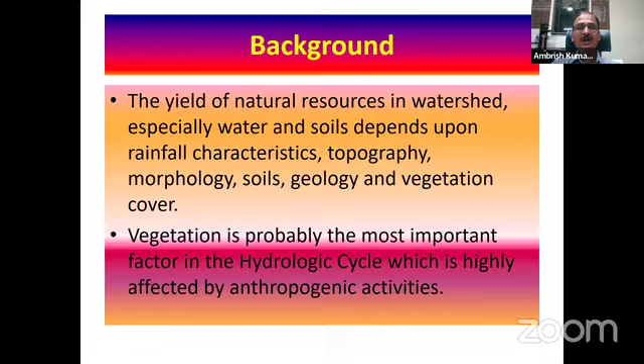So among all these factors, vegetation is probably the most important factor in the hydrologic cycle, starting from rainfall occurrence, runoff, evaporation, cloud formation, and again rainfall. If we see the entire hydrologic cycle, vegetation is one of the key factors, which is highly affected by anthropogenic activities. And this activity we can manage to some extent, compared with rainfall characteristics, topography, morphology, soils, and geology, which are natural and difficult for human beings to manage.

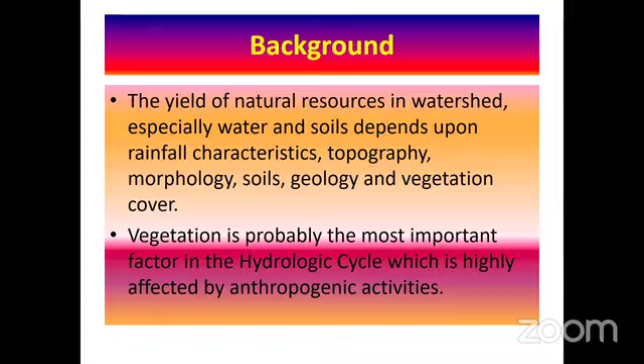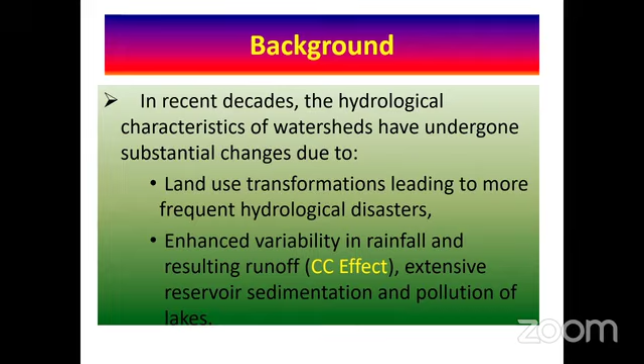Now, in recent decades the hydrological characteristics of watersheds have undergone substantial changes due to land use transformations, leading to more frequent hydrological disasters. In the last two decades, their frequency is very high and diverse. Enhanced variability in rainfall resulting in runoff is, of course, a climate change effect. Rainfall days, duration, intensity are all changing widely in a short span of time. It leads to extensive reservoir sedimentation and pollution of lakes.

So some figures will help to understand the watershed and why its management is required. For land degradation, the watershed is one of the ways, methodologies, or concepts by which one can manage it. First, what type of degradation: water erosion, wind erosion, chemical degradation, physical degradation, and how much area in the country is affected, irrigated and non-irrigated. In the second column, water erosion with soil erosion intensity of more than 10 tons per hectare per year is 73, the highest among all types of degradation.

Total arable land affected by land degradation is 104 million hectares. Water erosion is highest; around 70% of the area is degraded by water erosion. In open forest, where canopy is less than 40%, water erosion is again highest, and the total is 16. So the grand total of degraded land is 120.72, and this is harmonized data from various agencies.

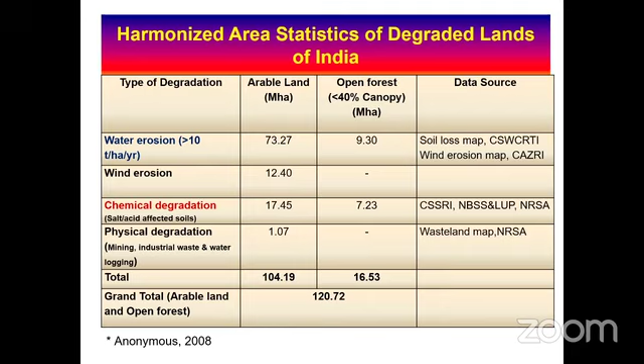So why watershed management? Loss of vegetative cover, followed by soil degradation from various forms of erosion, as indicated in the earlier slide, has left land thirsty for water as well as hungry for soil nutrients. Secondly, regions with livestock-centered farming produce less biomass for animals, which reduces animal productivity, and the inevitable uncontrolled grazing on eroded lands further accelerates erosion. Grazing is a requirement for our livestock, but it causes erosion and deteriorates the ecological balance of that region.

Growing population, as we all are aware, with higher demands for food and fodder coupled with rapidly changing socio-economic conditions, has added fuel to the fire. This factor, population pressure, is tremendous, and we know its repercussions, particularly on the land, where the land-man ratio is reduced. Fourth one, the piecemeal approach. As I told earlier, watershed is not a new term.

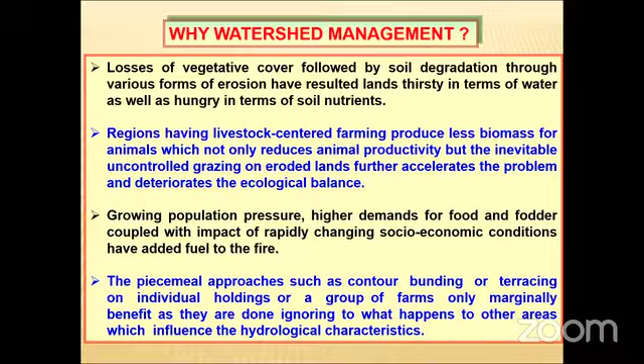So this is also one of the reasons why we're talking here. So sporadic actions generally fail to attract farmers. If the action is divided in a piecemeal approach, the outcome is not achieving at the end what is expected. Certainly, our approach will not attract the farmers.

Thus, for maximizing the advantage, all developmental activities should be undertaken in a comprehensive way on a watershed basis, what we call integrated watershed management. Thus, watershed management emerged as a new paradigm for planning, development, and management. So, watershed, the terminology is the same. Our approaches in planning, development, management are changing with the need of the time, based on our experiences, regional experiences, countrywide experiences, or the experiences taken from other scientists working in their own countries.

So social and institutional aspects, apart from biophysical aspects, following a participatory bottom-up approach is also necessary for getting an effective outcome of the watershed. Watershed management becomes increasingly important as a way to improve livelihoods of people while conserving and regenerating natural resources. So we are trying to manage the biophysical aspects, minimize or control the degradation, cost of cultivation to support or improve the livelihood condition in rural areas.

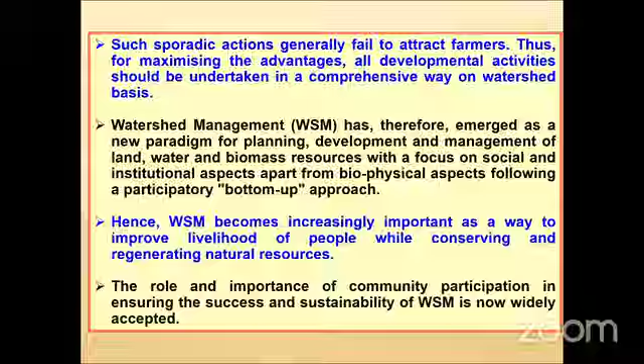So approaches and concepts. In the last 50 years, we are trying many variations in conceptual models, objectives, implementation models of watershed programs, and a number of angles added on in the last few years for betterment of the watershed and to connect it with the climate change resilient approach. The initial protection-oriented approach got enlarged to restoration of degraded areas and then to protection cum production.

So every activity done on the field has some objective, final outcome, end product. So here, production. If our activity in the watershed is well connected to agriculture production, higher productivity per unit area in our natural resource ecosystem, it means the actions taken in the watershed are in the right direction. Watershed management is a single window, integrated, participatory and sustainable area development program.

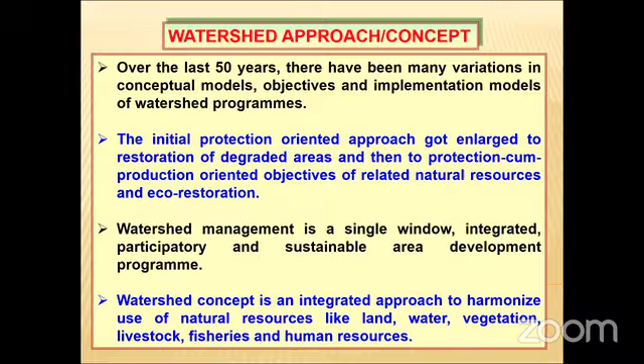Second, the integration approach means starting from a small watershed and upscaling and expanding the area from one watershed to the adjoining area and further adjoining area. So this is also integration. Your effective activities in a larger area, starting from a small micro watershed. A hydrological unit of an area draining to a common outlet. This is the typical definition of the watershed. Of course, most of our fellow participants may be aware: an area having a single outlet for draining water.

So here we are trying to count the water, every drop of rainfall falling in a watershed, as runoff, conserving it as in situ moisture conservation or recharging the groundwater system of that local area. So hydrology is an important factor to understand a watershed. And we also call it a hydrological unit. Watershed is a hydrological unit, and we are accounting, budgeting water in a watershed. It is a classic way of working.

The land, water, and vegetation resources. And the watershed concept has been used extensively because of the importance of water balance in the study of ecosystems. So water balance: rainfall occurrence in a particular area of the watershed, then storage, surface storage, in situ moisture conservation, thereafter recharge. So surface and subsurface interaction is also important to understand if we are talking in a broader sense of a watershed. So groundwater recharge is also one of the key activities in watershed management programs. It also allows accurate measurement and monitoring of components of water balance in the hydrologic cycle.

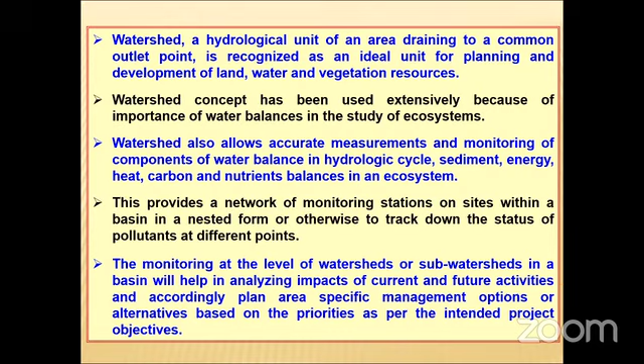So a larger watershed can be divided into a few sub-watersheds, and those watersheds monitored having different land uses. So the impact of land uses on two parameters, soil loss and runoff, can at least be correlated, or we can develop some formulation or method for the relation between existing land use and runoff and soil loss from a given watershed.

So the level of concern is evident by the wide variety of programs and institutions involved in study and management of the watershed. And I have been informed that students and progressive farmers are also attending this particular program. Therefore, I am going slow and slow so that everyone can understand the concept of the watershed properly.

So the traditional top-down approach of watershed management has not paid dividends, particularly because it stressed entirely on biophysical aspects without due regard to socio-economic factors. So these are the factors. And the last point here, integrated watershed covering the area from top to bottom approach is the better way to understand the watershed.

Watershed workflow - of course you are aware, the Pradhan Mantri Krishi Sinchayee Yojana, watershed management programs are under this, and PM-KSY has an end-to-end solution approach. Meaning if you are going to start something, that should have an end product or conclusion.

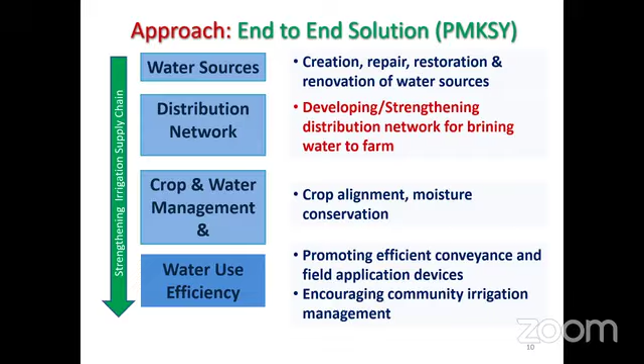So these are the slides helping people understand the activities: rainwater harvesting, community water tanks, groundwater sources, river lift irrigation, water harvesting techniques, terracing, bunding, conservation bench terraces, on-farm development, lined open channels, underground piped conveyance systems, small synthetic collapsible pipes. Nowadays micro irrigation is popular - the National Mission on Micro Irrigation.

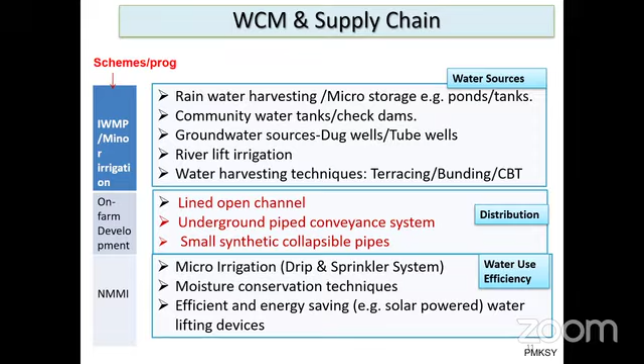Now, soil and water conservation techniques in watershed perspective. Here, for better management, we divide the area into two parts: arable lands and non-arable lands of a selected watershed. In arable lands, on slopes having up to 2%, we have the option to manage soil erosion through crop management.

Cultivation, contour farming, and other methodologies can be managed through plowing and related activities. If the slope is larger than 2%, it's better to go for terracing up to 6 to 8%.

Field bunding is important nowadays under climate change conditions, where rainy days have reduced but the intensity of rainfall has increased in most areas. Field bunding helps a lot, and ridging of the field is important to store rainwater.

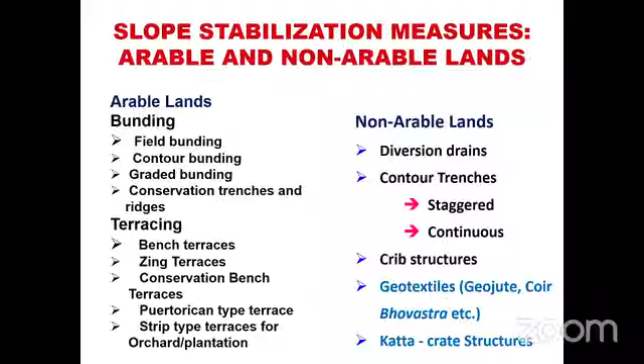Now let's look at why we are working on all these, and what is the impact of these soil and water conservation technologies. In a few forest-dominated works done by the Indian Institute of Soil and Water Conservation, I would like to show the data.

One of the activities is in the Fakot watershed, which many of our friends here are aware of - it's a model watershed started in 1974 by the Indian Institute of Soil and Water Conservation, and thereafter Sukhomajri, which is also a nationwide popular watershed near Chandigarh.

So one example I'm giving - what are the parameters? For biophysical activity, whether on arable or non-arable lands, what parameters should we monitor as indicators to understand the impact of the watershed?

Runoff percentage in pre-project, during intervention, and after withdrawal of the project - you can see after 10 to 12 years, the runoff percentage was very high at 42%, and thereafter reduced to 14%.

Soil loss was around 11 tons per hectare per annum, which reduced to less than 2. Dependency on forest fodder was 60%, which also reduced. Fruit production, milk production, cash crops, and animal rearing methods - every indicator improved.

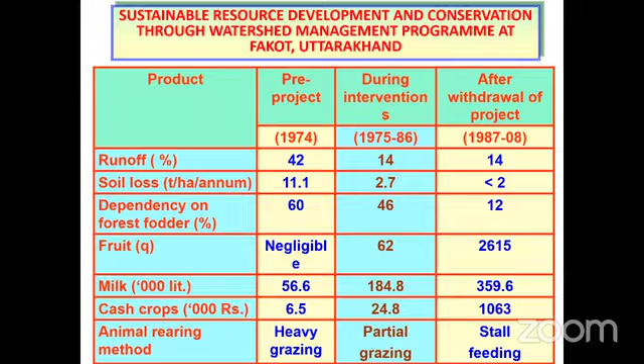After implementation of 10 years of various land and vegetation related activities in the watershed, there's another aspect - drainage.

Drainage is also a problem, with drains eroding after every rainy season - their size increases and affects the adjoining area. So drainage line treatment management is required.

One of the streams, this drain, was treated, and we can see the indicators - runoff in millimeters. Before treatment it was 55, reduced to 38. Dry weather flow is also important to understand.

In most streams, we see in summer drying has already started, and in newspapers we see drying and dying of streams. Of course, watershed management helps in rejuvenating streams, and watershed practices make streams perennial for longer periods.

Dry weather flow increased from 100 to 250 days. Sediment load reduced from 320 to 5.5. Vegetation cover increased from less than 5% to more than 95%. This is the impact we are observing here.

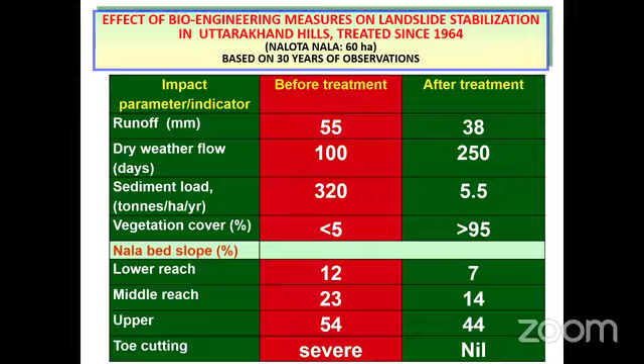Bed slope in the lower reach, middle reach, upper reach, and toe cutting - every parameter we can see reduced in favor of land productivity.

In a mine spoil area, various activities like silt detention barriers, gabion structures, as well as vegetation on sloping areas were done, and the impact was drastic. Now anyone can visit that area and see a lush green area.

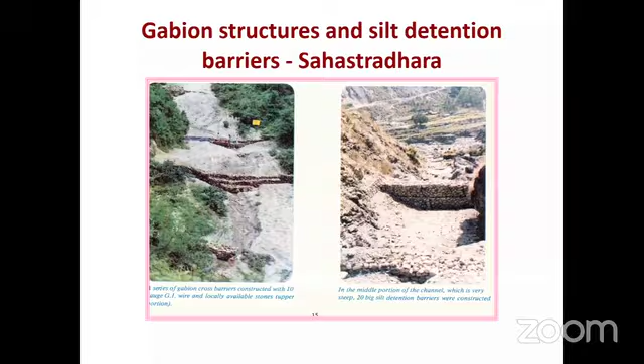So we can see two visuals - the condition on the left, and after treatment, on the right.

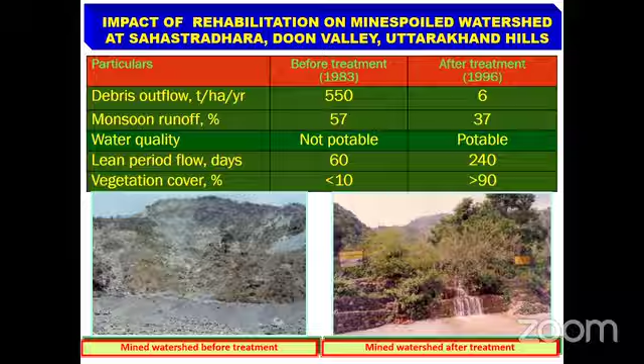In another watershed at Almora, monthly data was calculated across three types of watershed: pine, agriculture, and mixed forest. The runoff was calculated, showing the total runoff reduction achieved through engineering measures, vegetation measures, as well as conservation agriculture adopted in that area.

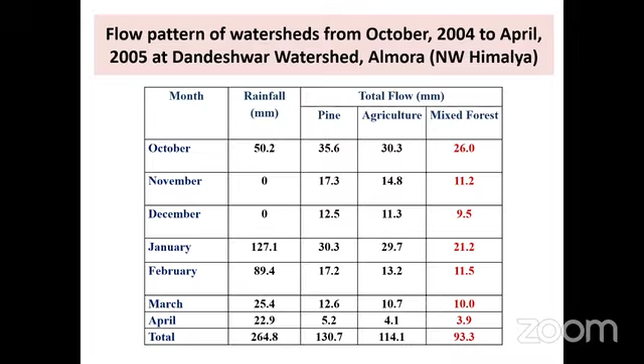This is also a bioengineering measure done in Shivalik Hills, and in the last line we can see the runoff reduced from 21% to 3%.

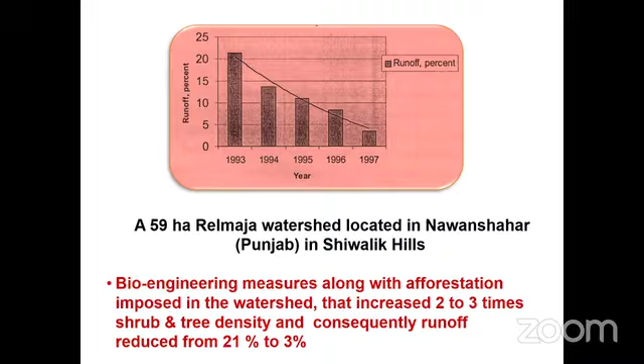Continuous contour trenches - this was a bare sloping land that was rehabilitated by continuous contour trenches in Punjab Shivalik Hills, and this is the impact on that area.

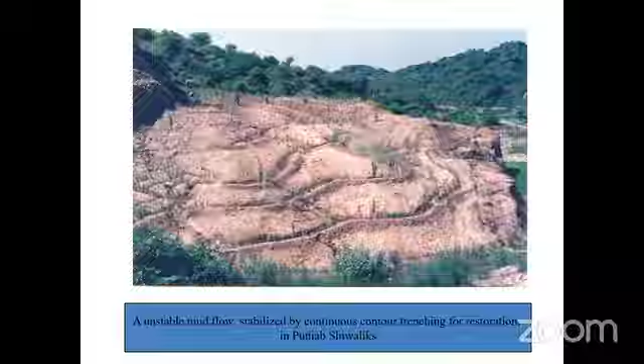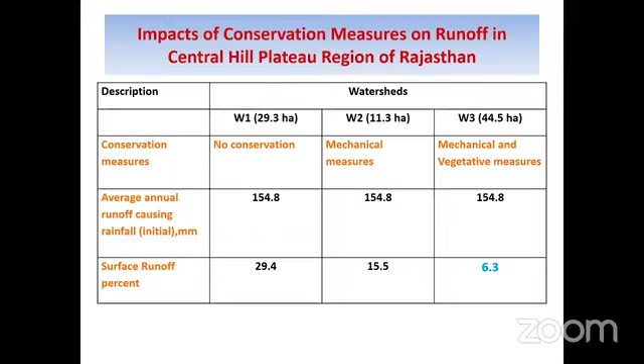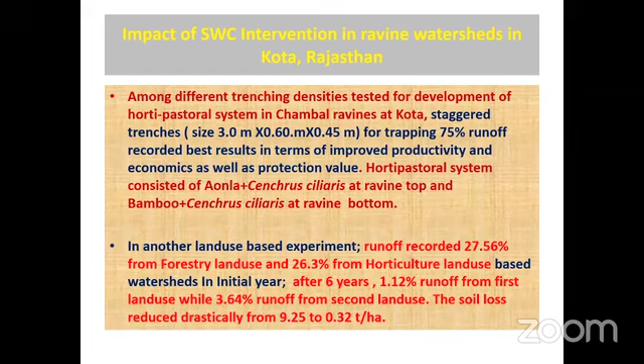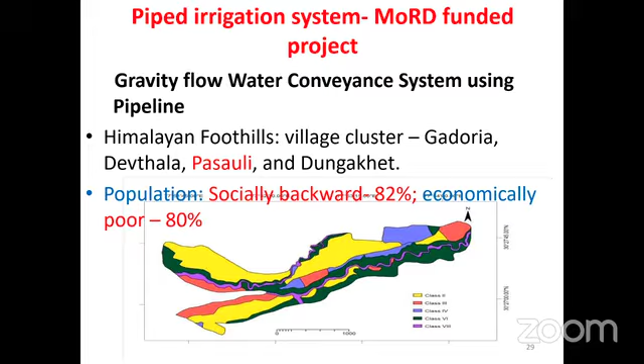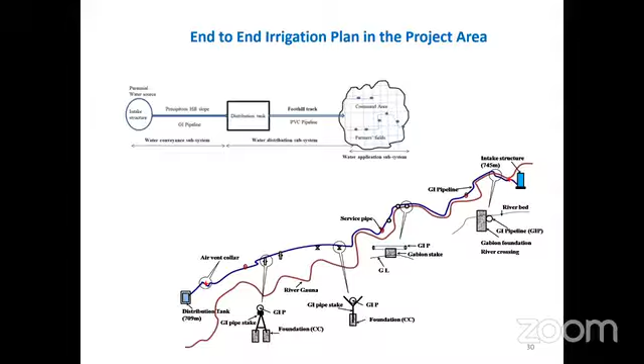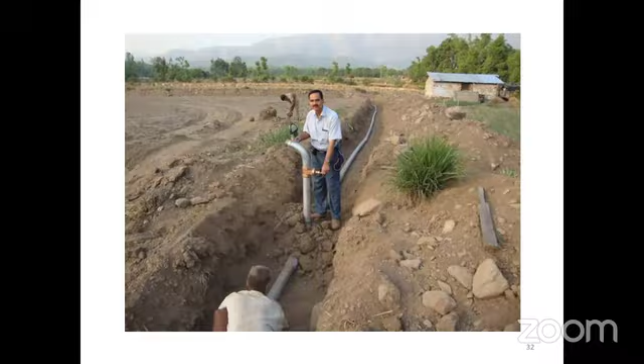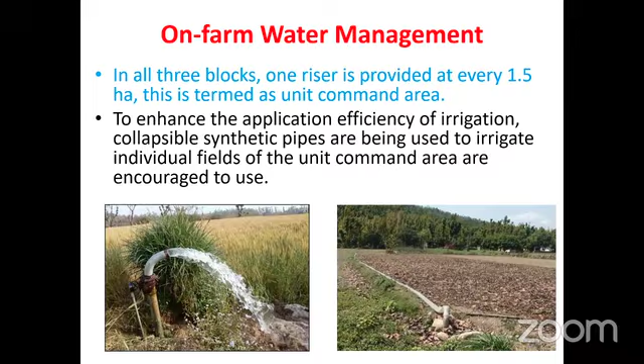Now coming to PMKSY, which focuses much on irrigation. In one area, a conveyance system was developed from source to the command area, which earlier was completely rain-fed, near the Shivalik Hills. As shown in earlier slides, the contour shows wide variability and undulation. A PVC pipeline system was laid in the command area, particularly in degraded and scanty hilly areas, and on the farm, every 1.5 hectare of this entire command area has one riser equipped with a control valve. It is completely developed on a participatory approach, with a micro irrigation system also connected to this.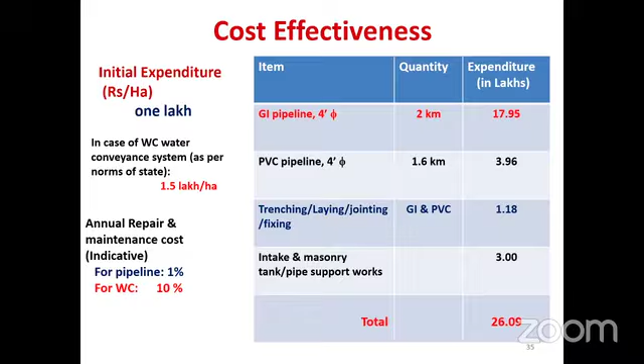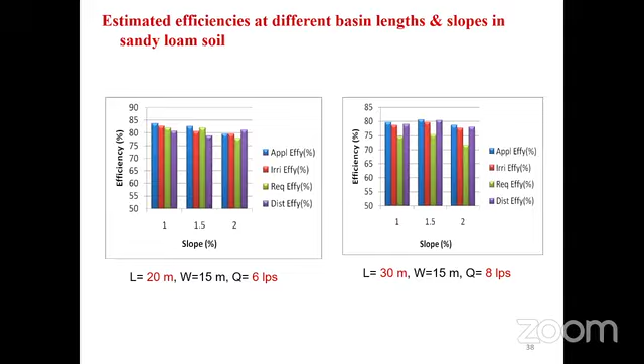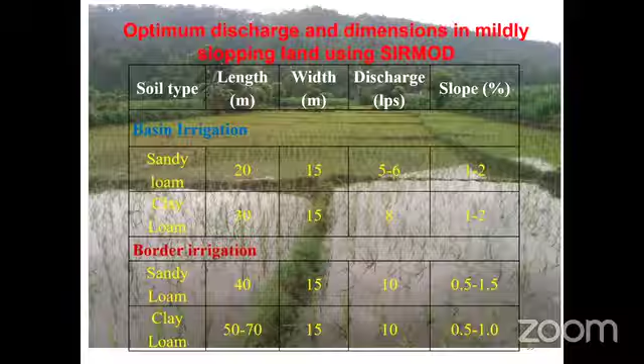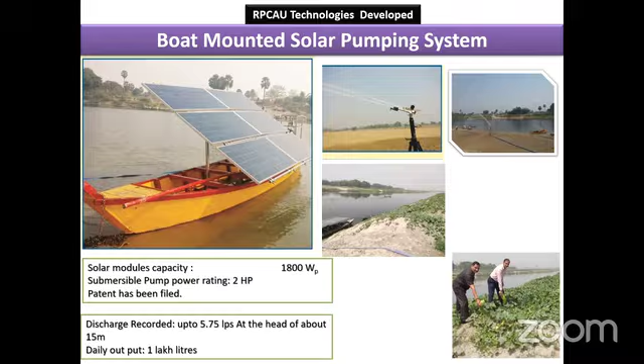At our university, Dr. Rajendra Prasad Central Agriculture University, we tried some innovations, particularly renewable energy, meaning solar pumps, and applied a boat-mounted solar pumping system in the river adjoining area. The network of rivers in Bihar and UP is very high, and in this riverine area in summer season, even in a stream there is water, but there is no irrigation facility. So solar pumps were applied here, and farmers are getting to cultivate vegetables, particularly in the riverine area of the rivers. These are some visuals.

Solar tree - it is also a tree with the pump, connected with the pump in some areas.

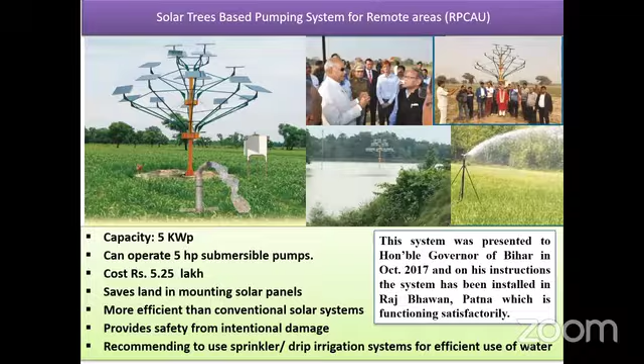So coming to some conclusions - what should we do? Develop a repository of database from various sources. This is the difficulty, we have less database, and in watersheds we have to create and record the database to sustain the system, and also the people who are interested to work in their watersheds can review and learn from older experiences. Segregation of impact of individual technical interventions done in the watershed on runoff, soil loss, and vegetation cover is needed to assess the efficacy and adequacy of interventions.

Here we have a single output, but segregation is important among the various interventions to determine which one is most effective. Extensive monitoring of watersheds with state-of-art instrumentation is lacking, so monitoring or measuring of water in streams, soil, or groundwater status is important. Use the paired technique - meaning monitor one watershed and compare another watershed of that region with it. This will help in understanding and also quantifying the impact.

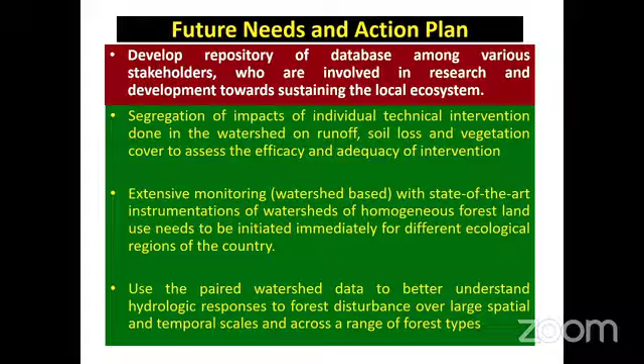Evolving methods for scaling up findings and impacts of bioengineering interventions from small homogeneous watershed to complex and heterogeneous watersheds is needed, since every watershed is heterogeneous, most watersheds are heterogeneous, so the factors and outcomes are complex. Long experience and studies should promote and strengthen a countrywide network for monitoring best management practices. Still, listing is required for every region and their evaluations in terms of tangible and intangible benefits. Climate resilient agri-forest ecosystem or agriculture based ecosystem data is required to be collected.

So this is all about my presentation. Of course, this topic is wide enough, and covering most of it is difficult in the short time. The 45 minutes is over.